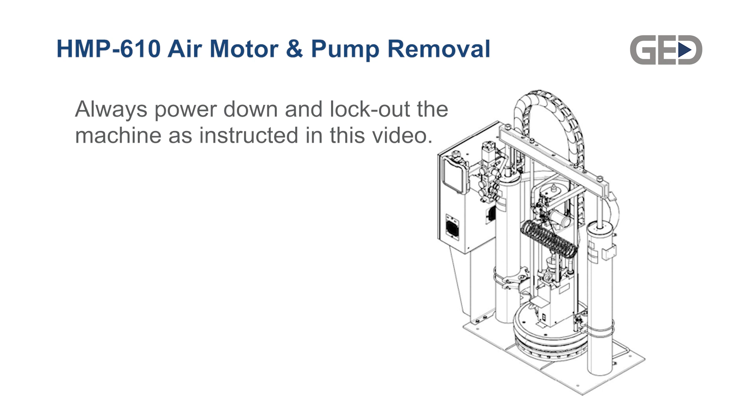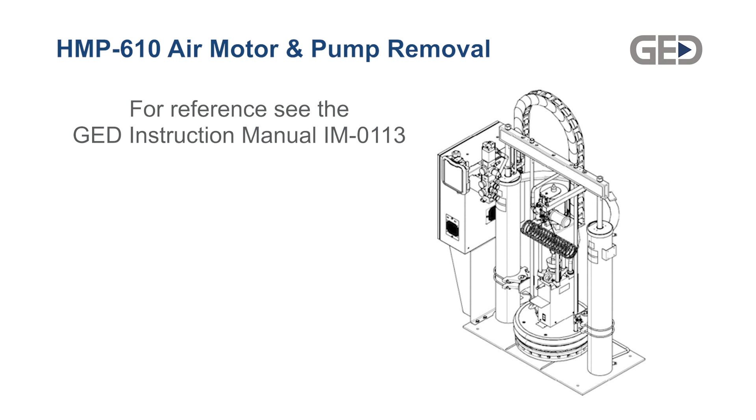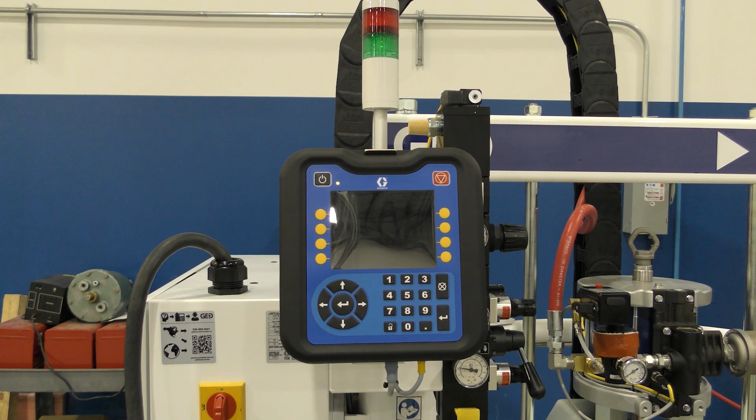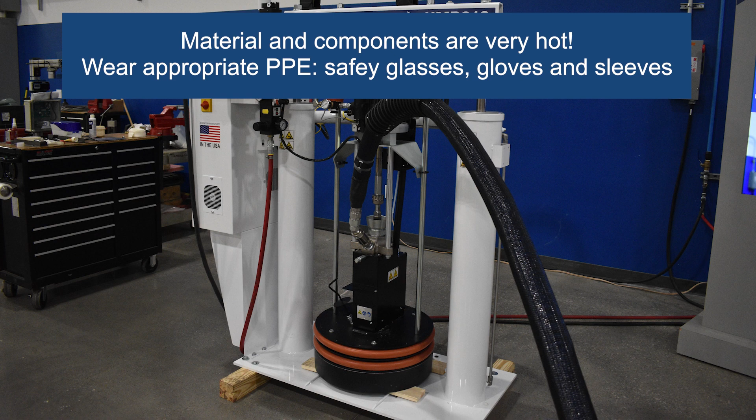This procedure will demonstrate how to remove the air motor and/or the displacement pump for replacement or rebuilding. The system needs to be heated to operating temperature so that the components may be taken apart and cleaned. Remove the ram plate or follower from the material drum and lower it to set on a couple wooden slats across the base.

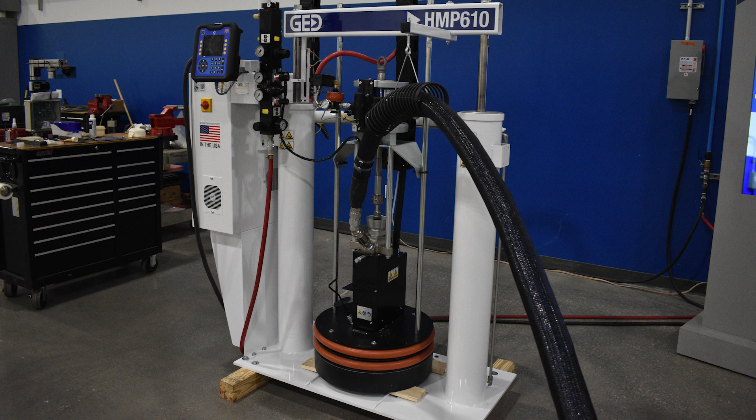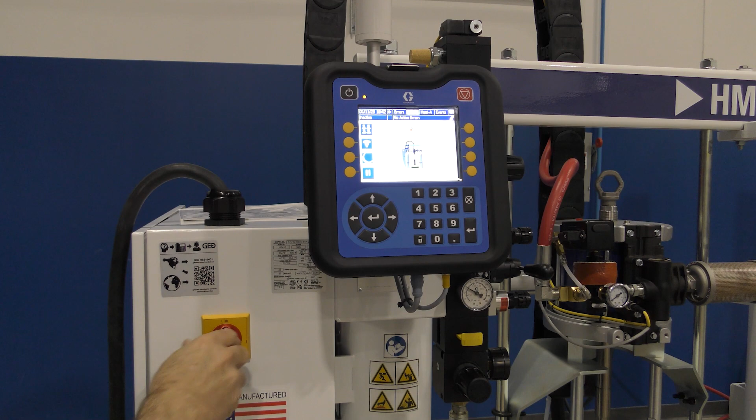Make sure the ram plate is down and the ram director valve or hand valve is in the neutral position. Turn off the air supply to the air motor. Bleed all pressure from the pump hose and foot valve by first activating the applicable heads and then opening the bleeder valves, or by running a few spacers through the extruder until the material pressure is under 100 psi. On the ADM, turn off the system heat, then turn off the main power and lock out tagout.

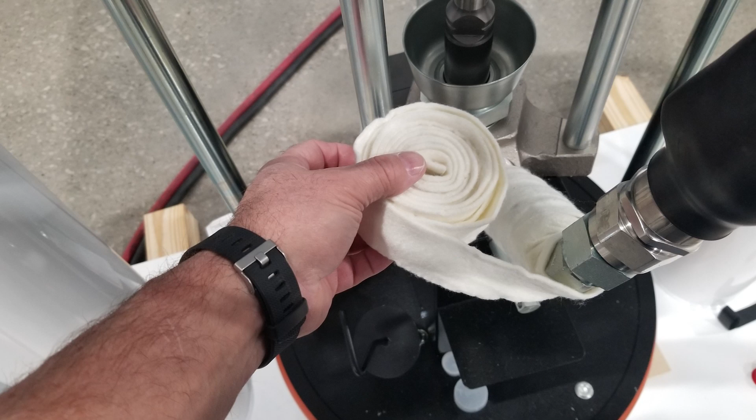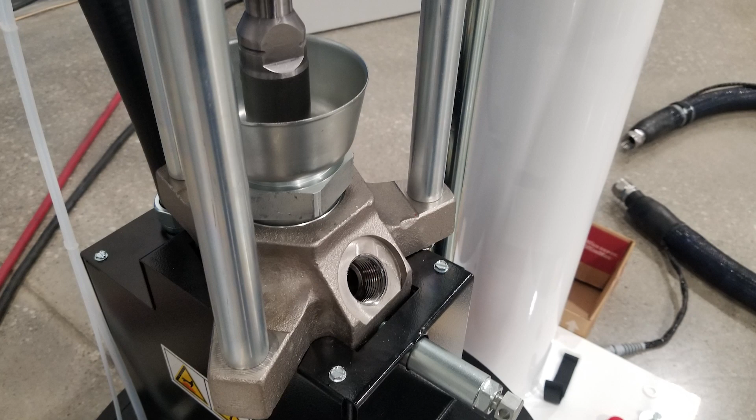Disconnect the material hose and remove the check valve assembly and/or the 45-degree elbow from the foot valve. Remove the pump sheet metal enclosure and disconnect the ground wire. Remove the hose clamp that secures the thermocouple, then remove the band heaters.

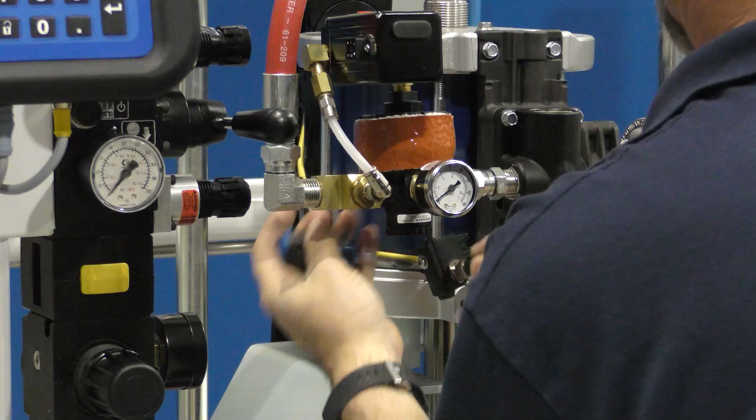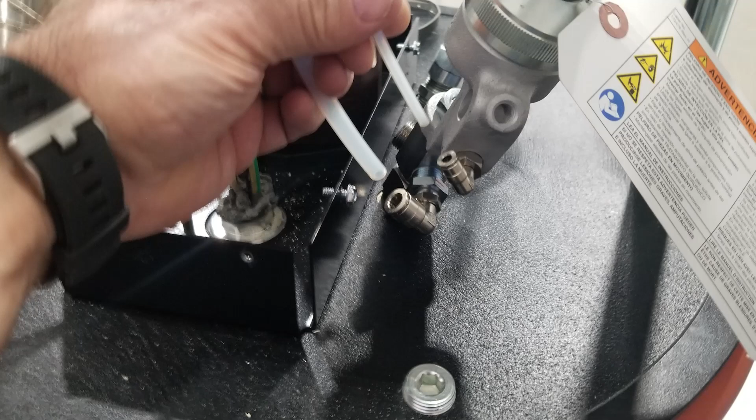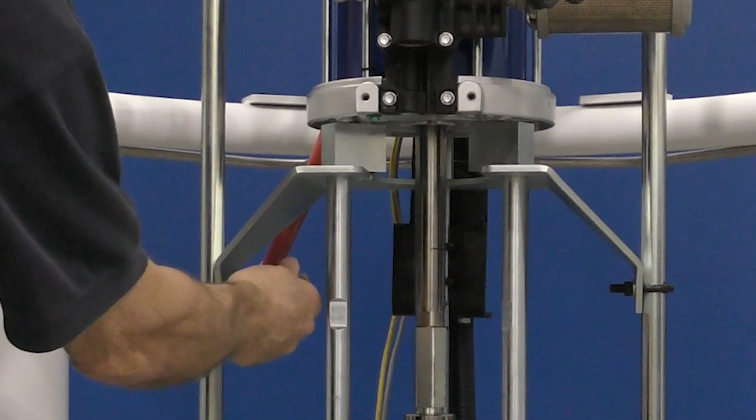Disconnect the proportional valve signal wire and the air motor position sensor. Remove the proportional valve and fittings. Remove the air lines to the follower blow-off valve. Tightly strap the air motor to the tie bar through the air motor lift ring. Loosen and remove the U-bolts from the platen lift rods.

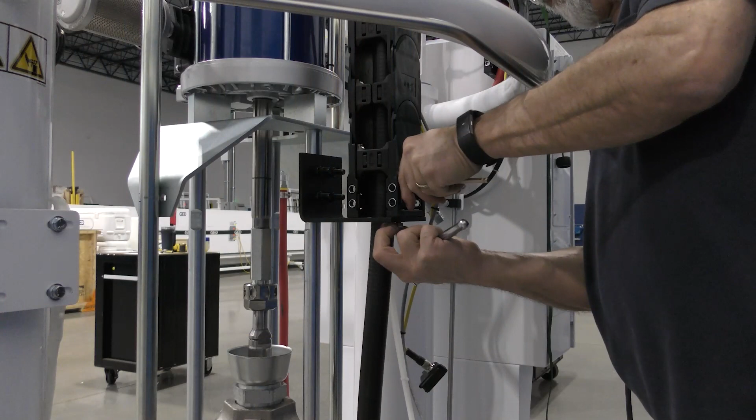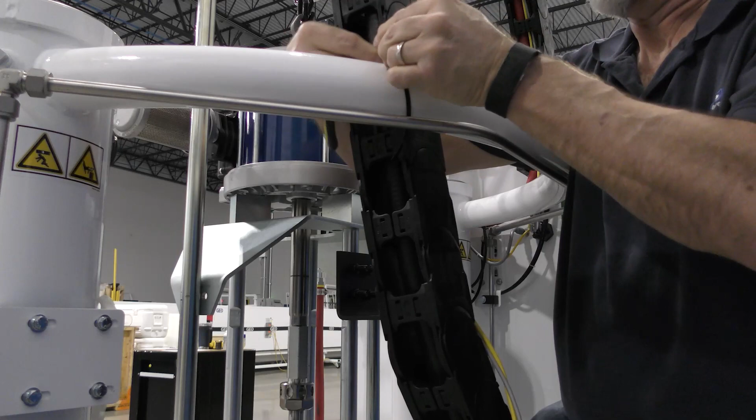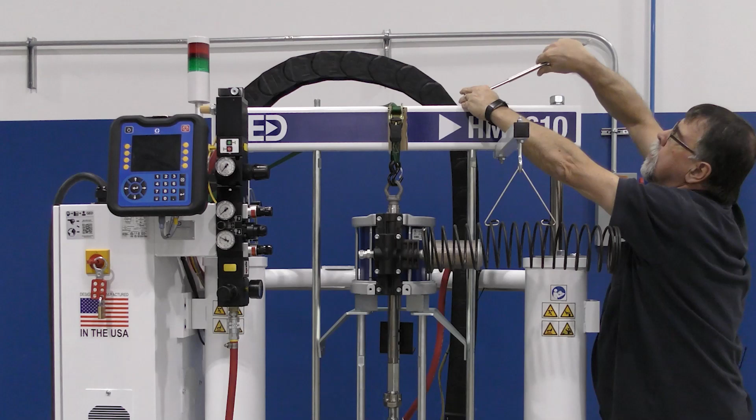Remove the nuts from the air motor standoff rods at the pump end. Remove the nuts and bolts holding the cable track to the air motor support plate. Slide the end of the cable track out of the mounting plate and zip tie the track to the ram support tube. Remove the nuts from the follower lift rods. Fully loosen the pump rod coupler to the air motor rod.

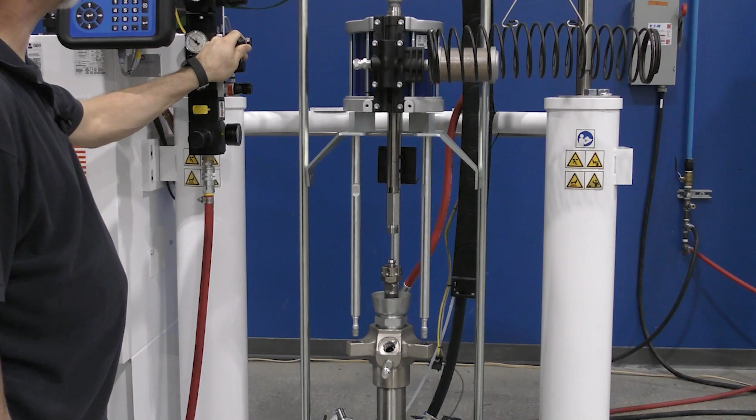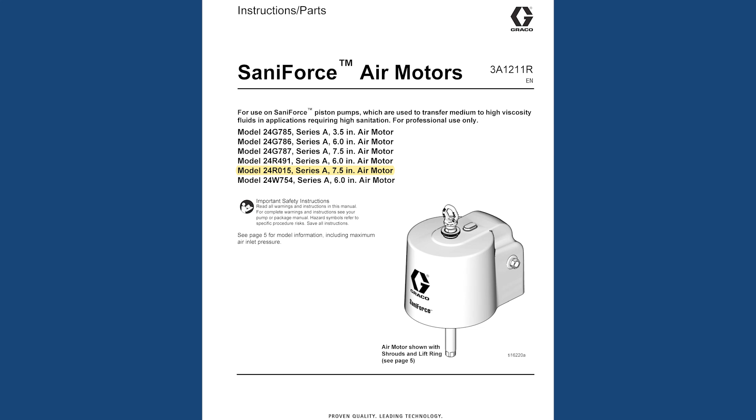Slowly raise the elevator to achieve enough separation from the air motor tie rods to remove it from the pump outlet housing. Remove the air motor and repair or replace as necessary. Reference the Graco SaniForce Air Motor Manual 3A1211 Revision R.

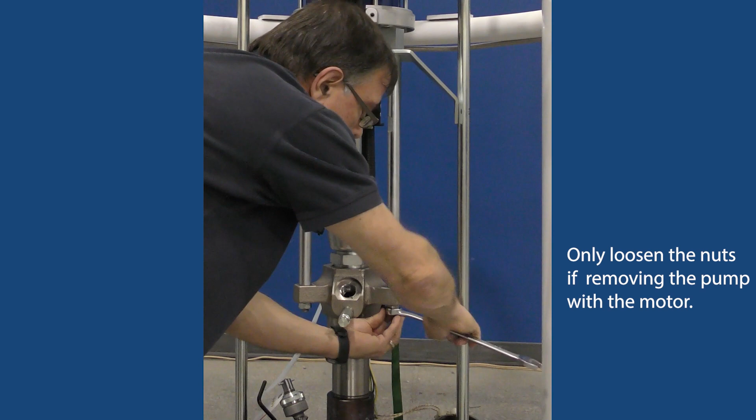If removing the displacement pump with the air motor, then only loosen the nuts from the air motor standoff rods at the pump end. Then, when raising the elevator, raise it until the primer piston seat is above the follower. Then slowly lower the assembly until the primer piston seat is resting on the top of the follower.

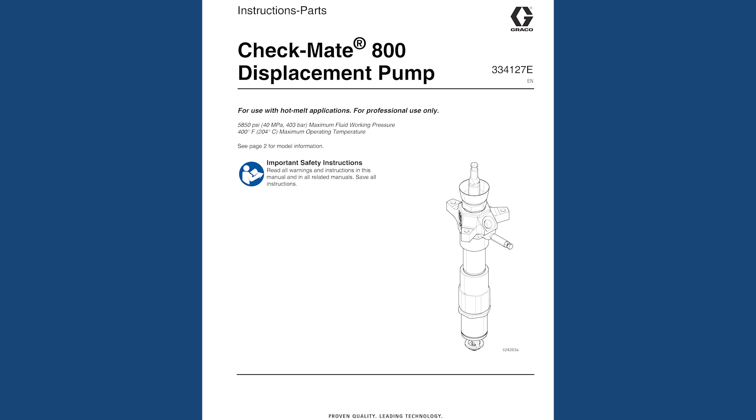Remove the nuts and steady the pump as you raise the elevator to clear the air motor tie rods from the pump. Place the elevator in neutral and move the pump to a stable surface. Pump rebuild procedures can be found in the Graco Check-Mate 800 Displacement Pump Manual 334127 Rev E. Reverse this procedure to install the new or rebuilt air motor and/or pump.

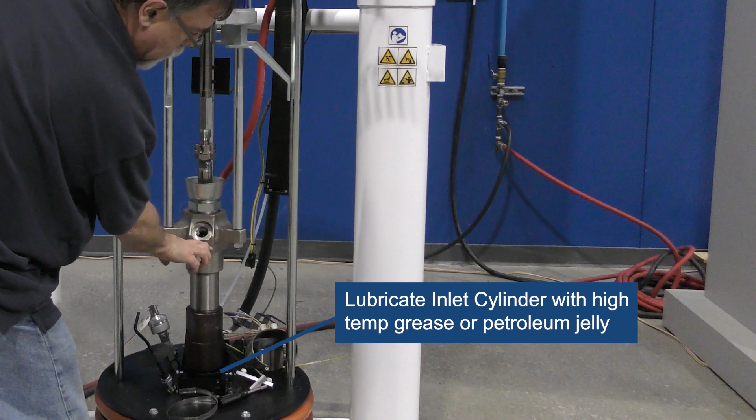Be sure to lubricate the inlet cylinder and O-ring packing with high-temp grease or petroleum jelly when reinstalling the displacement pump into the follower. Reconnect the air motor to the displacement rod and torque to 145 to 155 foot-pounds. Replace the nuts and lock washers on the follower lift rods. Replace the U-bolts to secure the air motor to the follower lift rods.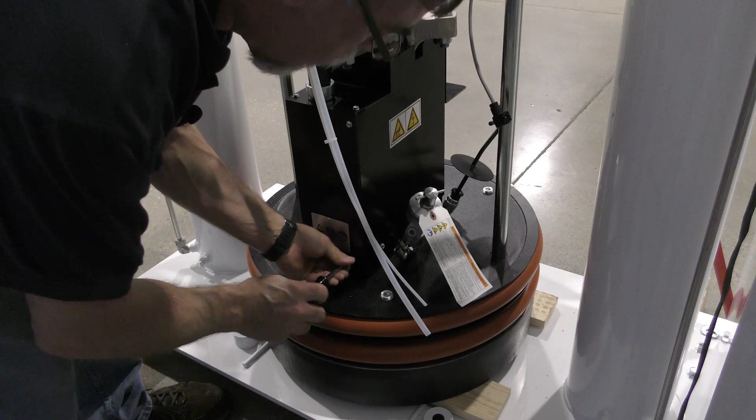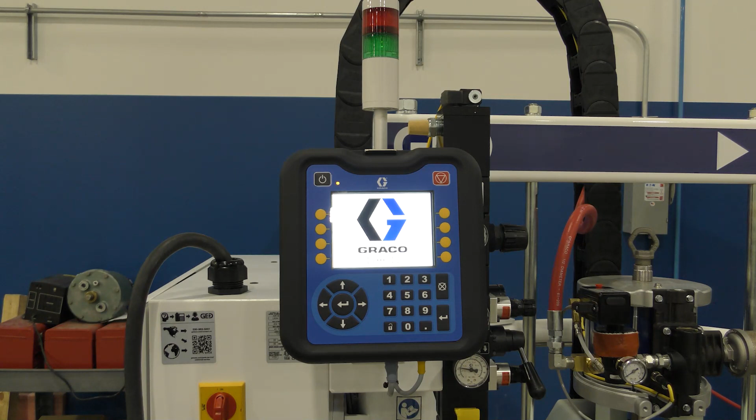Reattach the band heaters and the thermocouple sensor. Remount the cable track to the air motor support bracket. Replace the sheet metal cover and reattach the air lines to the follower blow-off valve. Unlock the main power disconnect and power up the machine. Allow the machine to warm up to operating temperature.

Replace the proportional valve, air motor position sensor and the proportional valve signal wire. Then acknowledge the alarm on the screen. Reconnect the material hose and wrap the check valve. Note, use a flat blade screwdriver to clean out the end of the hose. This will make it much easier to get the thread started without cross-threading.

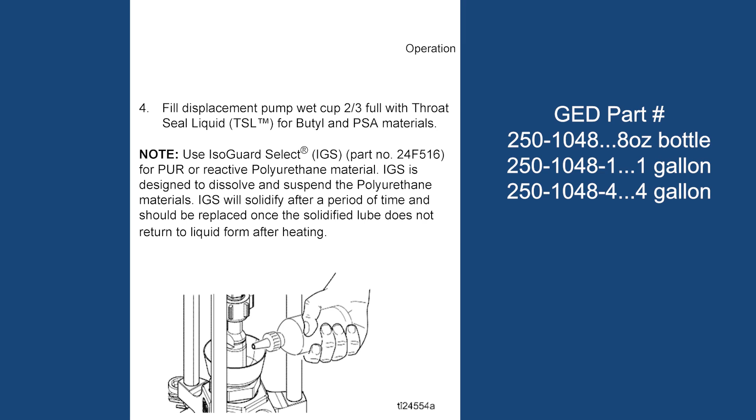Make sure the cup of the packing nut is 2/3 full with throat seal liquid. Raise the follower and make sure there's no dirt or debris stuck to the underside. Load a new drum of material as described in the manual or on the training video.